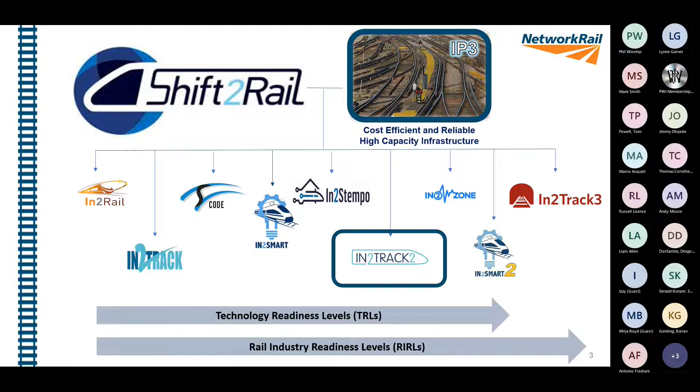Moving further forward, where we are and what we're trying to achieve in terms of the outputs of In2Track2 and then In2Track3, is to build technology demonstrators of solutions we've found for issues we know of within track currently, but also looking at, okay, if we start with a clean sheet of paper, what would we do differently? How could that be done? Some method of achieving the objective of reducing the delays and defects we might have with current technology, compared to what that might look like starting with a clean sheet of paper, and what we could develop to achieve the objectives.

So in terms of what we're looking at here, switches and crossings and plain line track. As you can see, you've got two work packages, WP1, WP2, WP3, WP4, in both of those different areas. Work package 1 is looking at enhanced S&C demonstrators.

We currently have S&C in track now. We know lots of failure modes that we have to struggle with in both work package 1, which is for switches and crossings, and work package 3 in the plain-line track. They're looking at what we've got now in terms of infrastructure, switch and crossing types, plain line track, and what failure modes we're really fighting to resolve. So let's have a look at those a bit closer and find some solutions as far as we possibly can.

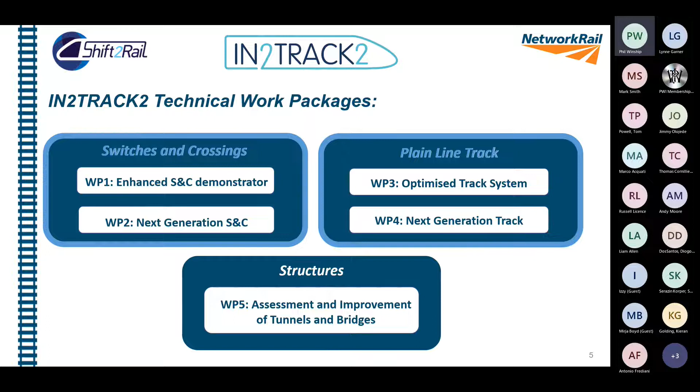So in terms of In2Track2, for the plain line aspects, we've looked at autonomous inspection and repair, track and S&C maintenance, and monitoring and sensing systems. These are just headline subjects within the work that's being carried out.

Kinematic systems, we're talking about point operating systems really - so actuation, locking and detection, and what issues we have at the moment with current systems, and what we could change to improve that. Design materials and components, that's across the board for switches and crossings and for plain line.

Autonomous inspection is part of switches and crossings as well, which we'll go into more detail later. Monitoring systems is something we're quite keen on introducing because we're really scratching the surface in terms of what we use currently. And the other part is digitization.

Looking at how we need to investigate building a track and switch and crossing digital twin. I won't go into details about what digital twin means and what it doesn't mean, but basically that's work looking at making, at a high level, a digital representation of the track and S&C, to use in the longer term as a maintenance tool - meaning we can look at how things degrade component-wise from real-time information from monitoring systems feeding into the digital twin, giving us asset life prediction and how we can improve that by changing certain components. Digital twin is quite a key area where we need to do a lot more work than we've done so far, and it's a very technologically advanced area of work that needs to continue.

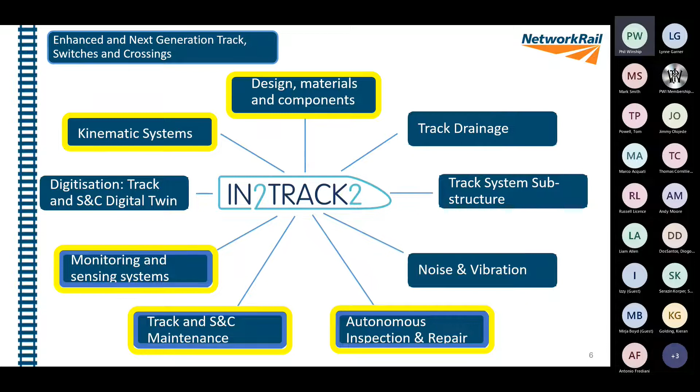So in plain line track, these are the projects we're going to talk about. Autonomous inspection and repair - in this piece of work with In2Track2, we looked at autonomous ultrasonic rail inspection, developing something more automated. Automated rail defect repair, that's the DDR, a discrete defect repair machine, which we'll go into more detail on. Rail stressing - how can we do that differently compared to how we do it now, and what tools and equipment are available. And monitoring and sensing systems, looking at thermal rail stress measurement and particularly track stiffness monitoring.

So those are the projects we'll talk about further as we go through. Looking at autonomous inspection, there are lots of areas where we can take forward ideas from different aspects of autonomous inspection and repair, and clearly look at how we actually take the data. We're very good at creating data, but really using it, making it more user-friendly so it's not too complicated for people to understand and operate.

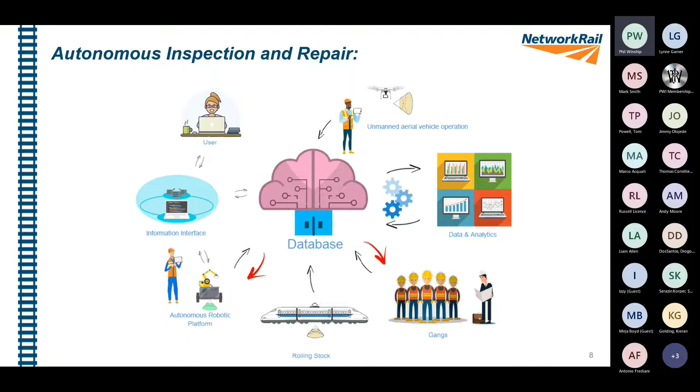This is a key area where we need to interface with lots of different systems, but make it easy to get the best out of it. Moving on to the autonomous ultrasonic rail inspection, this is linked to another project you may have seen on that list earlier, In2Smart and In2Smart2, which are more looking at control systems. Obviously, if you're going to have an autonomous vehicle, you need a control system to make sure it actually works the way you need it to.

This is basically a platform called the Warthog, which was bought for this particular project as an autonomous vehicle. It clearly isn't designed to go on track, it's just a platform used to show how this technology could be converted to a rail version of similar equipment, where it can go to a certain location, do an ultrasonic test, check for any defects, and then identify where those defects are. The next system, the Eureka moment, would be having a repair system that comes along after the ultrasonic system detects a defect and takes the defect out autonomously as well.

This is where this links in terms of work within the In2Track2 project from the track aspect. We need to liaise with other projects to understand how we control these types of vehicles. This is on the agenda and something we're looking to drive forward, to automate as much as possible to remove the human factor issues, which can be a problem in some cases.

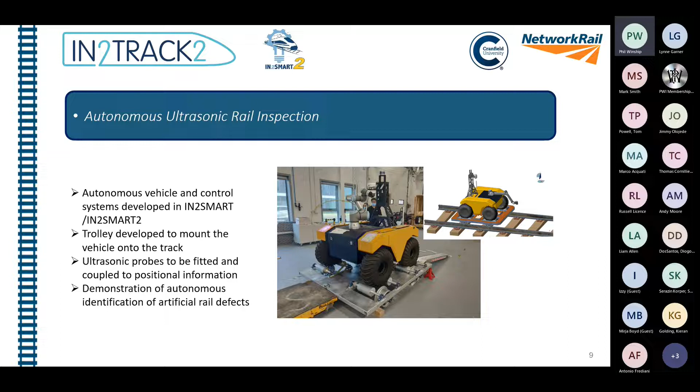The discrete defect repair machine is work that's been looked at in other projects outside the In2Track suite. Effectively it's an automated system to repair defects in plain rail. It's a solution looking at how we can take out squats, wheel burns, and those types of defects we commonly see in plain rail, taking out the actual person's involvement other than operating the machine from a tablet system.

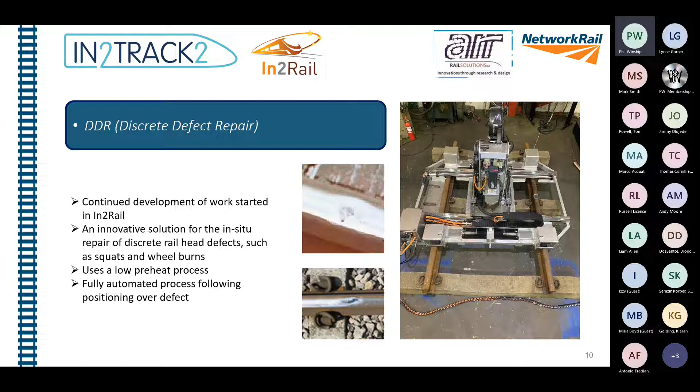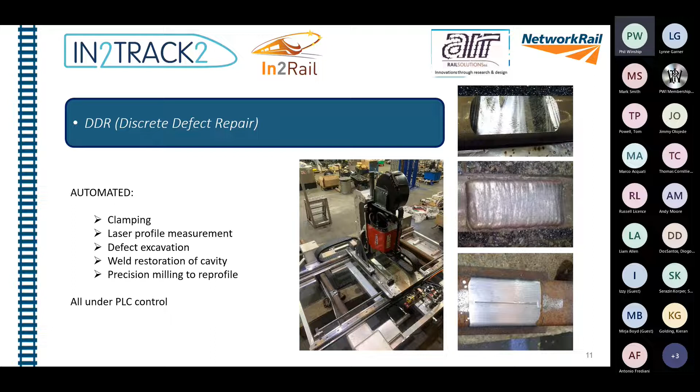It's fully automated and does everything needed to take out the defect, fill the void it creates with weld material, and then reprofile it to finish the rail back to an as-it-was-found situation, not as new. It takes into account things like side wear on either side of the defect and makes sure it blends into that area. It's got an automated clamping system and a laser profile measuring system, which needs to know what the profile should be after it's completely finished the weld.

Basically, this links to some work in In2Track3, but this is where we got to within work that finished off in January from In2Track2. That's the machine there effectively without any guarding on it, in the area where it's been tested to show it could work. A few things still need resolving, like guarding, to be able to get this on track to allow it to operate. We're going to be doing a trial of that in the next couple of months to get that worked through.

Effectively, it's milling out the defects, so it's not grinding or anything like that. It's quite a lot of industry firsts, as you see here. It's got low temperature weld restoration, so it doesn't use really high heat compared to the technology we currently use for defect repair.

It's got an air cool system, which it obviously requires to keep the temperature down rather than having it turn too high. And it's all CNC operated, so it's all controlled by a computer numerical control system for the milling head, which is obviously again something that's not been used before.

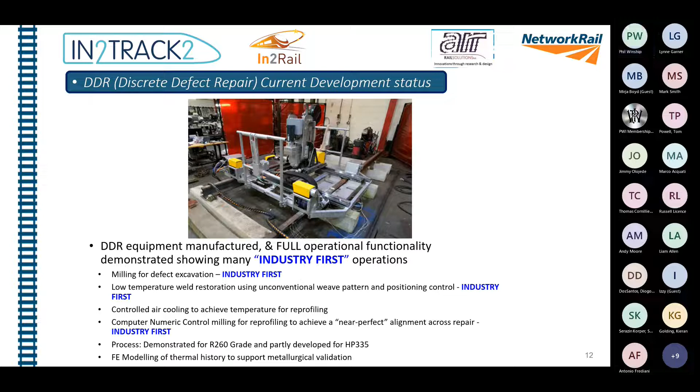Okay, this has been demonstrated on grade 260 rail, but we're looking at other rail types that we have in our infrastructure, HP in particular, because of the rail that we've used in the last few years. We'll look at finite element modelling of the thermal history of the metallurgy between the weld material and the parent metal, making sure we don't include any inclusions or defects that might affect the quality of the repair.

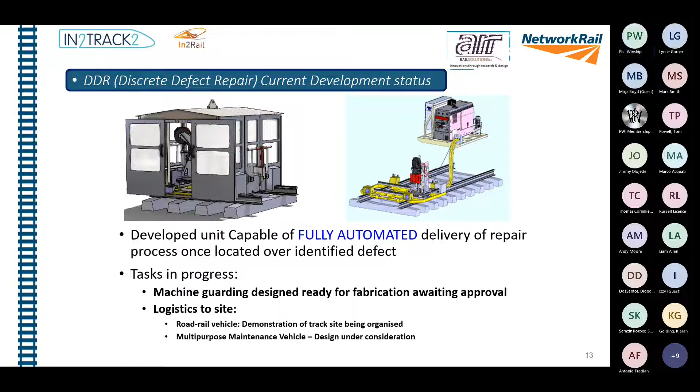So where we've got to at the moment is the system needing approval for a guarding system to go over the machinery, to look at how we do that from a safety perspective. We've just about got approval for that now, but it's going to take the logistics of getting the machine onto track to a different level. That's probably going to be done by something like an SRS machine, a truck with a bed on the back that can demount the machine into the right area where it needs to go. Then it can be operated and taken off track by the same method.

But here's a couple of videos that show how the machine works. There's a few that are maybe 20 seconds long that show a bit more detail about the machine and how it works. This milling head's taken forward through the removal of a defect by milling out the pocket to open it up to the right depth. We're talking about lengths of railhead between 50 to 100 millimeters in terms of defects we can take out, looking at the time it takes.

But that can be extended if you've got multiple defects like a wheel burn. You can take 2 of those segments out next to each other if necessary. But the time for the process to finish is going to be a bit longer to allow that defect to be repaired properly.

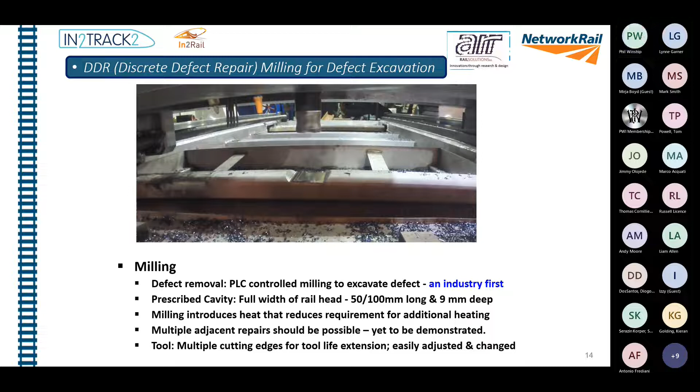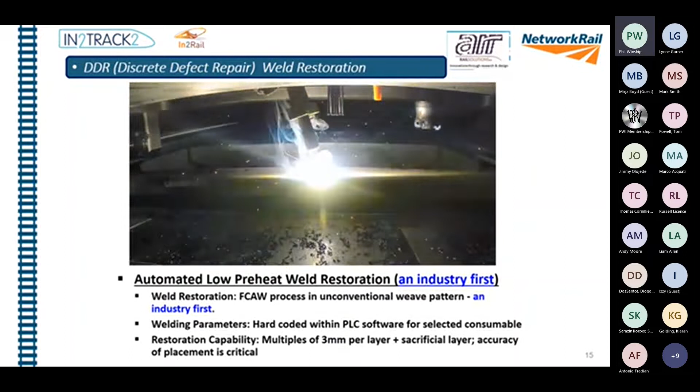So this is the next stage of welding the cavity to bring it back up to a profile that's above the rail on either side of the repair. And that's basically what it looks like. Nothing fantastic in terms of what it achieves. The way it does it is really the key thing, because anybody who's into welding knows that the distance between the wire and the weld itself is a key area where it needs to maintain that distance. So the machine needs to know that and adjust itself to keep that distance consistent.

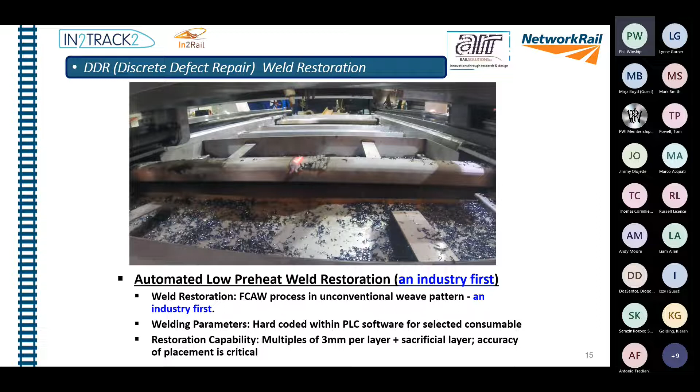Again, using a PLC, programmable logic controller, allows the system to be very well controlled. At the moment, as it says there, we do it in multiples of 3 millimeter layers, depending on the depth that's required. This is how we take the slag, if you like, off the top of the weld itself. These fingers, so to speak, excite and remove that material.

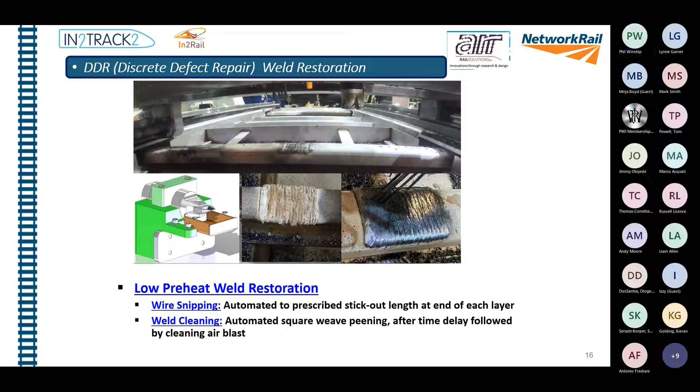So quite a lot of work's gone into that development over the last 2 years to get this to the stage where it's at now. And we're just about at the stage where we can take it on track, do a little bit more validation work after we've got the guarding put in place. So theoretically, we're looking at other areas of delivery, and that might be on the multipurpose maintenance vehicles, as well as using something like an SRS truck with a rail vehicle to take it on track and move it to whatever site it needs to go to.

But it's going to be a system where, with the work they've done so far, a repair takes about an hour. But clearly it's all computer controlled. It takes away the welder, the interface of the human factors and all those sort of issues. So you get consistency, and it is very reliable in terms of its actual use.

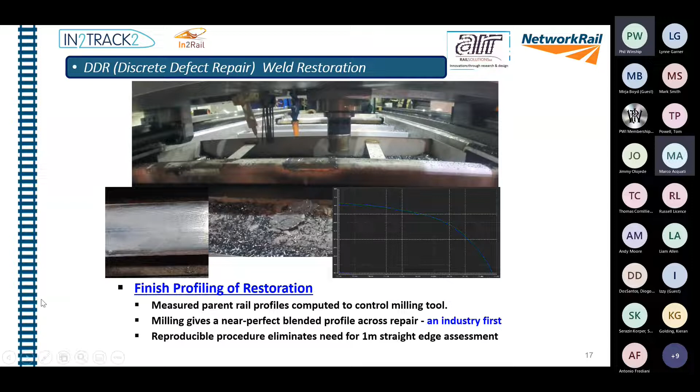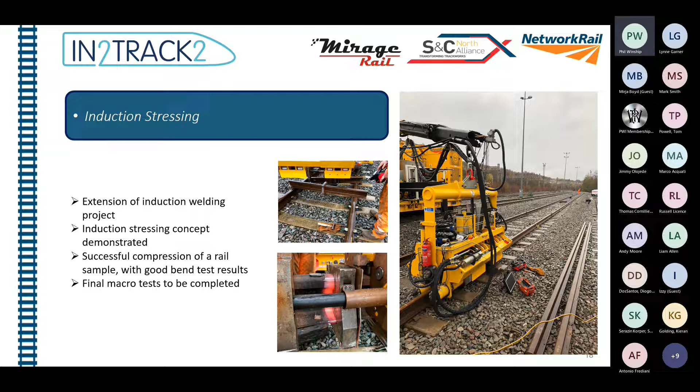So quite a lot of work's gone into that to try and understand a little bit more about how that could be done. I don't think it's got quite as far as we were hoping at this stage, but it's obviously a possibility for this to allow that stressing to be carried out at the same time as welding a rail in future with this system. So I think it's a case of understanding a little bit more about what needs to be done to work with this company to get this available as part of the service it can provide in terms of welding rail together.

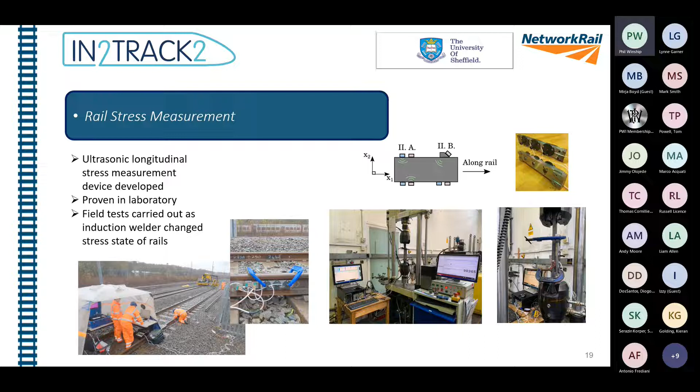Rail stress measurement. Obviously, we use various different systems at the moment to measure what stress we have in a rail. But this is looking at some method of ultrasonics as new technology to manage and measure stress better than we currently do with things like burst testing. So again, this is work that's in development from In2Track2, getting to a TRL stage of 3 and 4 at the moment. So it's a little bit of a way to go before it's available for us to start using in track, but it's looking very promising.

Other parts within the In2Track2 project are looking at stiffness monitoring of track. Clearly, it's an area where we've got quite a lot of data that we can see from things like the NMT, and looking at how that works. But there's two sides to this: what's the stiffness from the track point of view, and what does the vehicle see? If you've got some accelerometers fitted to a vehicle like the NMT, you'll get data from the vehicle perspective, which could be quite different from what the track perspective sees.

And looking at the data that's been captured from these particular systems and putting them into a model to understand what each of them is saying, and translating the information to see what the track and power car relationship looks like, is a key area where this track stiffness monitoring is going to hopefully give some good results to allow us to show how that track stiffness could change over time and what effect that has on the track.

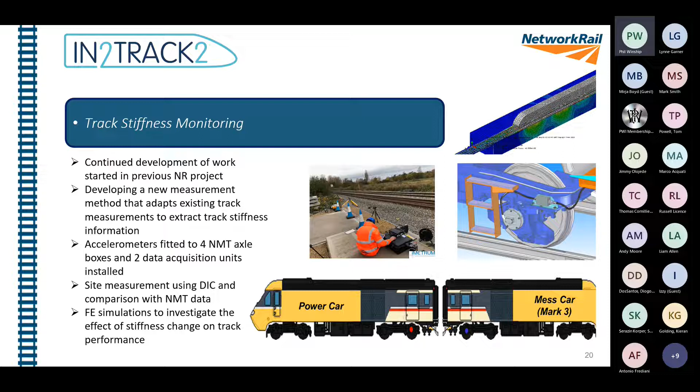So that's a quick run through the actual plain line track elements, which is mainly from Melanie's work. She would have done that presentation if she was well enough, but unfortunately not.

And moving up to my area, which is switches and crossings work, we've again looked at autonomous inspection and repair. So similar to what we've done with the discrete defect repair machine, we're now going to look at doing a crossing restoration machine. It's a similar sort of machine, but looking at how we can repair a defect in a crossing and a wing rail. So we'll go into that a little bit further in a minute.

Early inspection of S&C, there's some developments in that. We're looking to try and actually move that further forward in the In2Track2 project as well. But I'll give you a run through of what we've got so far with that.

Looking at track and S&C maintenance itself, additive manufacture or 3D printing, if you want to call it something slightly different, for S&C components. We've been looking at how that might work and what we could actually achieve from having that as an option for creating components in future, and what advantages and disadvantages there are for the particular requirements of different components where we might need this expertise and technology.

Handheld scanner, this is really looking at how we can do a quick scan of a switch rail and understand whether we've got an 053 switch derailment hazard that we need to do something about to protect traffic from running over that switch due to the issues that we've got.

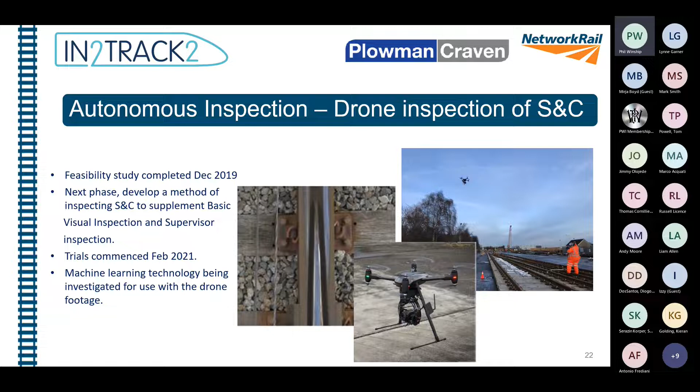But to allow us to actually get to that clarity, we need to look at what we call a ground sampling distance. If you think about your television, you've got different pixels on your TV screen to show you the full picture of what you're watching. The distance between the center of one pixel and the center of the other pixel next to it is this ground sampling distance. We had to get that down to about 0.94 millimeters, which is what we achieved.

That's quite a challenge, to make sure we got the actual clarity of the footage that we wanted, to show how we could inspect things and get the detail we'd expect somebody to see when they were walking the track. So that was a challenge in itself.

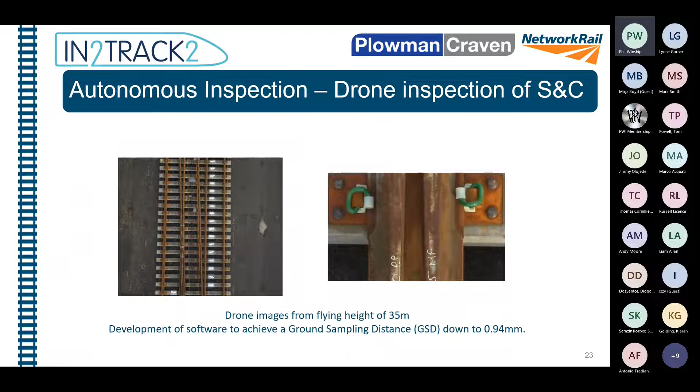So there's more work to look at how we can take dimensions off that footage. But clearly the other part of that is looking at how we can actually identify what changes might have occurred since the last inspection.

So looking at things like plain line pattern recognition from a train point of view - can we do that with a drone? Effectively, yes, you can. This is obviously a few slides here that will show what's actually been developed so far, just to basically show the concept is feasible.

You've got to train the model to see what it's actually looking at in the footage the drone is showing - this is still footage, not a video. You can actually mark up the clips in this case just to understand exactly what the software needs to see.

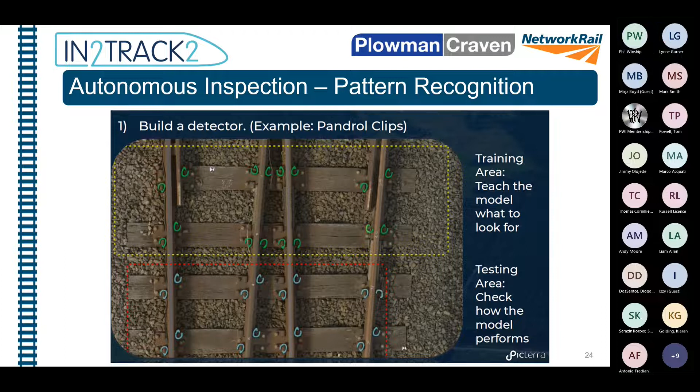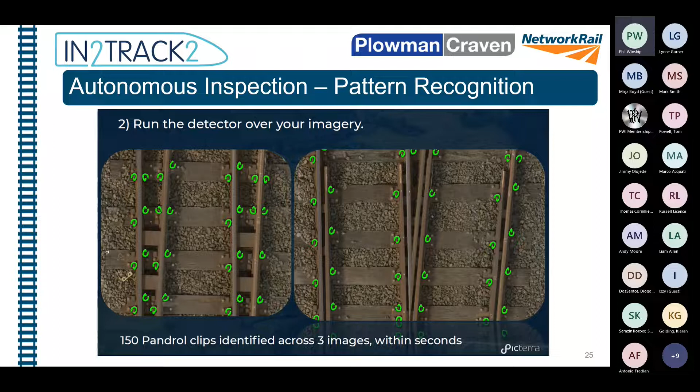So you've got to teach the model effectively what that clip looks like and what position you're saying looks okay, and when you look at some other clips, what position you expected that clip to be in. And if it's not in that position, how you actually flag up that something different has occurred. So you run the imagery with that requirement for where clips are to be identified, and this is the type of thing you get within a few seconds after it's been trained to recognize that.

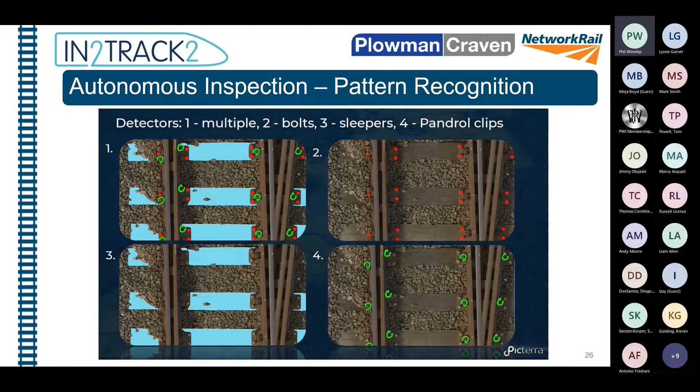So what I'm going to do with this is show a picture of two surveys. This is a still photo. I'm going to click on the link in a moment. One survey is from March 2021 and one from September. The cursor in the middle is basically separating those two surveys. If you move the cursor left and right, you'll see what's different in terms of the actual inspections. Hopefully this will work.

So this is part of the software that's been tested, if you like, to actually show what we've got here. This is obviously a very high level view of the track, so I'm just going to zoom in to a piece of track to show where things have changed. Just move it along a little bit, and zoom in quite a bit.

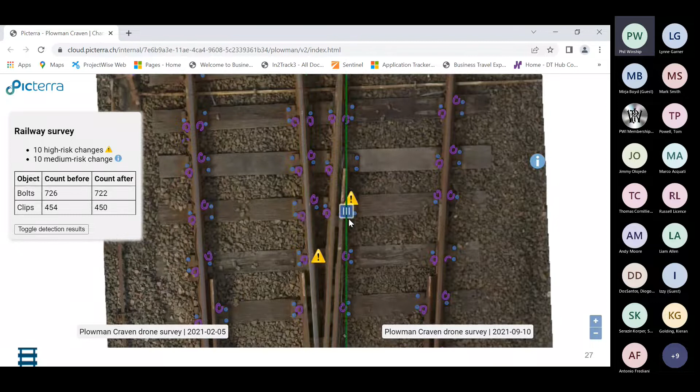So all those triangles are areas where the software has recognized something not quite the same as it was before. If I zoom a little closer, you can see on this one in particular it's got this identification mark over the clip. So on the 5th of February last year, the clip was in that position, and the other inspection in September on this side is slightly different.

If I move the cursor over, you'll see what happens when the clip is passed over - the clip's moved, it's obviously come out over that time. That's what this type of software can do, and that's the sort of powerful imagery you can get that's quite easy for anyone to use to show any difference that might have occurred between two inspections. On the left-hand side here, you've just got a count of different bolts and clips, and the discrepancies are these hazard triangles - yellow triangles with an exclamation mark - indicating that something seems to have changed, and you need to have a look to understand what that is.

And in this case, the clip's come out. So it just shows that type of thing where we can use the software to articulate what has actually happened in terms of inspection purposes, and it can clearly be identified and pinpointed to where we need to look rather than having to look through the whole of the S&C unit and inspect it individually just by somebody looking at a video.

So that's the technology basically of where we are with the drone itself. That's a work in progress in terms of where we are with that work. We're looking to take this further forward to actually develop it to a point where we can start showing it as a potential for us to introduce something like this in future.

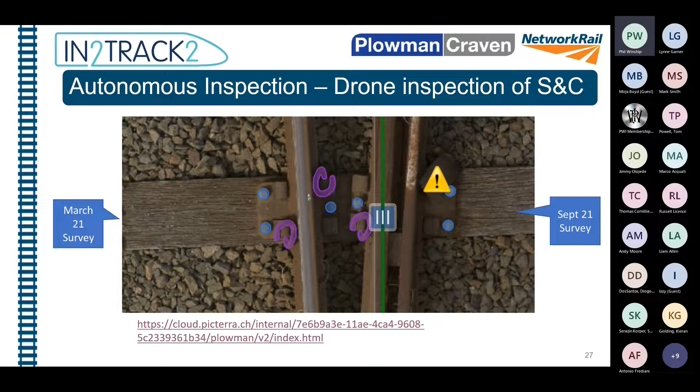Okay, autonomous inspection. Moving forward to autonomous repair, we're looking at, as I mentioned before, how we can develop something that will repair a crossing automatically, so it doesn't allow us to have the problems we've got with weld repair crossings at the moment. For those who may not be familiar with crossings, you've got a different profile on the crossings, and it depends on the angle of the crossing, which is an issue that needs to be considered.

The direction of traffic can be another problem where one particular part of the crossing, one side, actually sees more wear than the other. So that needs to be something that's looked at to understand how we actually repair a crossing to make it suitable for traffic still to run that direction, but clearly taking into account the less worn side that's on the other side of the actual wear area we need to repair.

But the thing that's important for us is to make sure we look at the wing rail and crossing nose relationship. At the moment, the bigger problem for us is actually the height difference between the nose of the crossing and the wing rail.

If we start getting batter on the wing rail itself, or the crossing nose more commonly, that height difference can increase, and it's just then a vicious circle. You get more impact through acceleration of the wheels hitting the crossing nose as they pass over that gap.

Therefore, you get more batter and more damage occurring on the actual crossing itself. So theoretically, if we can actually repair the wing rail and the crossing nose, so we can reduce that gap, even if we're recreating a sort of worn profile that may be required because of the actual wear that's been seen on the crossing itself, we can reduce the height difference between the nose and the wing rail. We can reduce the actual impact loading that the wheels are putting on the crossing, therefore bringing us back from the point where we might actually develop a crack in the crossing or break the crossing itself.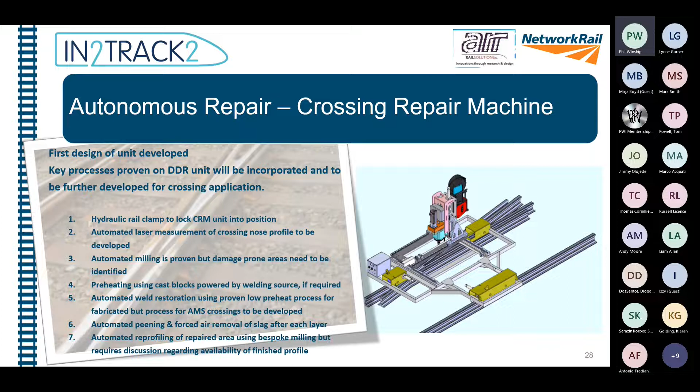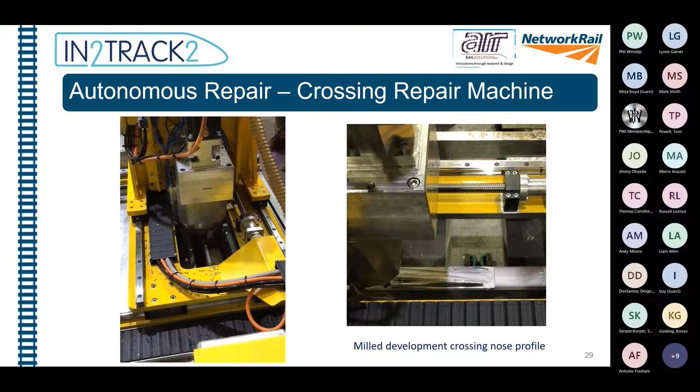And how it would actually mill that out of something solid like this at the moment. So that was just a development phase to try and understand what was possible with the software, how it actually worked, and how we created a profile of the nose itself, because obviously the actual gradient of a crossing nose as it comes up from the point is quite different in terms of different crossing angles. So it's a key area to actually understand what software needs programming to give us that profile that's required, taking into account any wear on the wing rail and crossing that needs to be factored into the repair itself.

So moving to additive manufacturing of components. Well, this is something that we've looked at because of issues maybe in terms of legacy components. If it's a specific component that's bespoke to a junction, it might be a case that if we try and order a new one, the manufacturer might not have actually made one for 20, 30 years. So the mold, because we cast obviously most of these at the moment, may have been ditched because they deemed it never being used, so why are we keeping hold of it?

So what we can do in some instances is look at reverse engineering componentry. So what you see on the right-hand side is a guy with a scanning system, a laser scanner that's actually been pointed over the actual component, and then it creates a CAD drawing of it. So this is what you've got in the blue photo there at the top - that component is actually a distance block. That really creates a CAD model of what that component looks like, every shape, every nook and cranny.

And if you look on the bottom in the middle, you've got some little areas where somebody looks like they've hammered the actual component at some point, and it's even got those indentations actually modeled as part of the CAD profile. So that's how powerful these laser systems and CAD drawing generation is - it creates the actual mirror image of what it sees.

So as part of 3D printing, we can then look at optimizing that component. So what I mean by that is we've got a big solid block of cast iron there potentially, in terms of what we use currently. But is it over-engineered? Is it a case where we can reduce the amount of material we're using, therefore reduce the cost, but obviously try and maintain the actual performance requirements for that component?

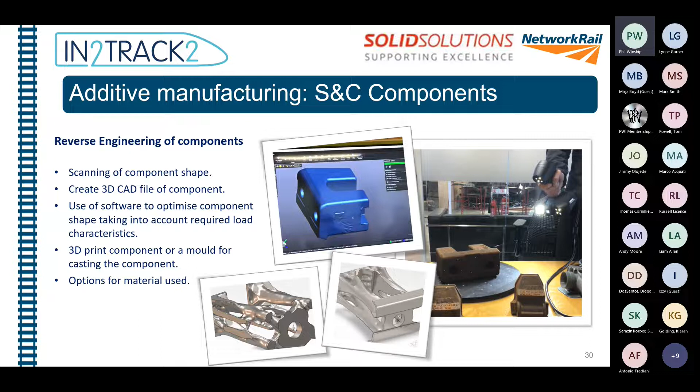So we can reverse engineer that to give us the flexibility to still make those components, without the problem of finding out where the mold's got to over the last 30 years. So it's an option for us for legacy systems, particularly where we know we don't have a manufacturer making these systems or components anymore, to allow us to recreate them. So it's quite a powerful way of taking things forward, especially with the number of legacy type components we've got in plain and track and in S&C.

This is a very early prototype at the moment. It's going to be something a little bit bigger than a large mobile phone. It'll have an app on it to allow you to look at your mobile phone and see the data coming off it, rather than having a screen on the system itself, because that would make the actual system quite bulky. So effectively, this is something developed to show a quick and easy way of assessing a switch.

If you're inspecting the switch and you think something looks a bit suspect as to whether it's a derailment issue or not, you can check this with this particular device to find out the answer. It takes out the human factor issues of actually putting the gauge on the track, offering the P8 profile up to the switch rail, and understanding visually where that contact point is. At the moment it's quite heavily influenced by human factors in how we inspect switches this way, so this device should give us consistency without those issues.

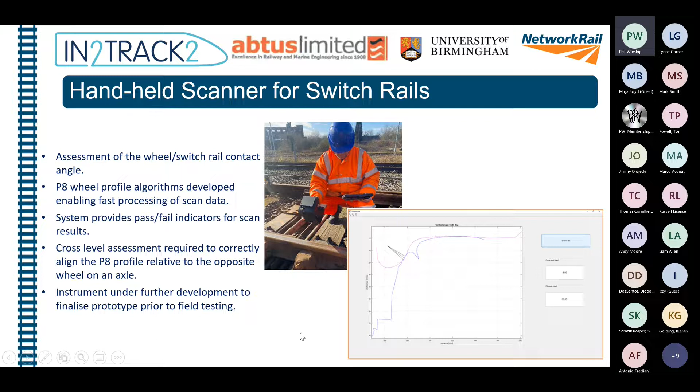It's going to be quite interesting to see how this finishes off in terms of its size and capability in the next 12 months. We've got about another 12 months to work on this particular project, with a lot of influence in terms of using lasers to do some assessments of the instruments on the switches we look at.

And then our NR56V crossing, quickly moving on to that one. A lot of work has gone into modelling what the wheels need to change in terms of the profile of the crossing itself. The University of Huddersfield has done this work, looking at around 100 different wheel profiles of different types, different wear rates, and different potential issues—some very obscure, others quite common in terms of the wear we see on the different types of wheels that run on our infrastructure.

From that, it's been a bit of a compromise to understand what that profile then results in, in terms of optimizing the requirements for that crossing. It's been a trade-off because of various issues, such as different directions of traffic, different wheel sets, and different vehicles reacting differently with suspensions, etc. So a multi-body simulation has been done with a model developed to allow us to put all these potential parameters in, to come out with a profile that is a compromise but gives us a lot more flexibility in terms of the height of the crossing nose to wing rail relationship.

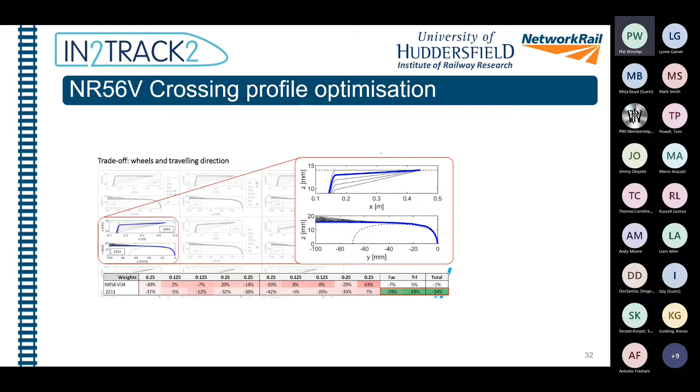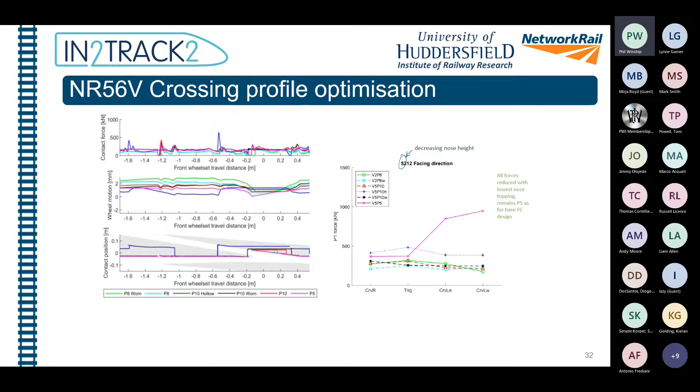This is some other modelling looking at how stresses are applied to the gauge corner, how it moves over in terms of its trajectory as it moves from the wing rail to the nose of the crossing, depending on the profile of the crossing itself. Quite a lot of work has been done on the type of profiles we see on crossings now, and what we need to achieve in terms of changing what that profile looks like to reduce the forces, using this type of modelling system.

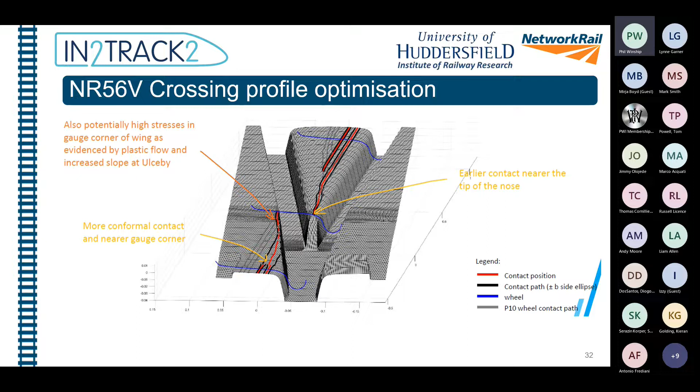And finally, looking at switch rail coating. So this is something we're trying to actually look at, whether there's any potential for us to coat the switch rail, or maybe clad it if it's a thicker layer, to reduce the actual wear rates of the switch rail. So if it's 260 grade steel, we could add a tungsten carbide type material perhaps, or something like that, and whether that will reduce the wear rates at the switch rail, give us more life and reduce the defects we see. So lots of work has been going on to look at that with the University of Sheffield.

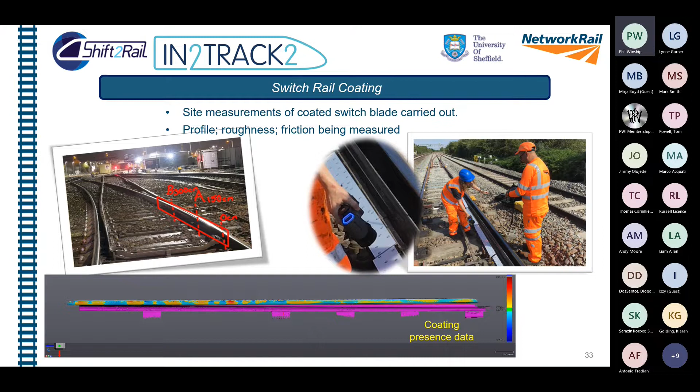It wouldn't go in mainline track because clearly there's quite a lot of issues in terms of safety case, etc., to allow us to get that put through. But we'll be looking at perhaps another railway environment, maybe somewhere like British Steel's site, where it's using rails to move things around the steelworks, but it's not going to be safety critical in terms of passenger traffic, etc. So quite a lot of work going on in that area to look at what type of coating might be useful and whether it's viable in terms of the potential benefits it might give us.

Okay, the next stage was looking at RFID tags. So you're thinking, well, why on earth do we need to know where our S&C is? Well, the problem we've got at the moment is there's lots of legacy systems like GEOGIS, for example, that have been brought forward into the S&C Ellipse condition monitoring module. And that means the legacy systems have different areas in terms of where they've been programmed to say where S&C starts and where the S&C finishes. And there lies a problem: sometimes we get black holes of a few meters, maybe 20, 30 meters, where the track recording vehicle says the S&C is here, and physically it's slightly somewhere else in terms of what the trace is seeing.

So if we can look at putting an RFID tag on two points which we know shouldn't move, and that's the crossing nose and the switch toes, we can then articulate where the S&C starts and where it finishes. So when you're looking at your trace from a track recording vehicle, you can actually see where the issues and defects, if you like, actually are.

Are they actually in the S&C, or are they on the approach or beyond the S&C? And this is the sort of area where we can actually align all the systems we have to say this is now a definitive way of identifying where your S&C actually is, and how that relates to what we've got from a track recording vehicle.

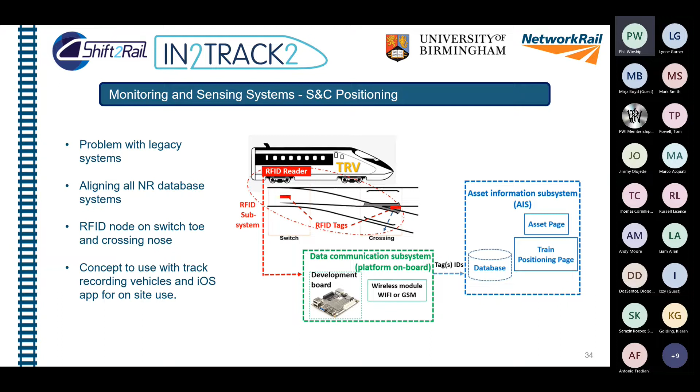So there's no requirement for somebody to have lots of expertise and skill in measuring S&C and assessing whether there's any radius or any other special features in the S&C that they need to put on the order, which is clearly going to be quite an advantage for us in future.

So this is just a quick run through of the testing that they're doing. The University of Birmingham have got this test facility in Derby, which is about 200 meters long. They've been assessing whether we use a passive RFID tag, which isn't sending information anywhere or being charged, so it will only activate once the train goes over it, or semi-passive, in other words, one that's semi-alive, or awake, and gets linked to the train as it goes over. So those are the areas they've been assessing.

What we've got on the right hand side is this little model train that can fire down that track at around 30 miles an hour. So it's reflecting in scale terms whether a high-speed train would be able to read the RFID tag at that type of speed. There's lots of work being done at the university to understand what's possible with these tags and decide which is the optimum type of tag for taking this project forward. And In2Track2 itself is moving this to the next level in terms of technical readiness levels.

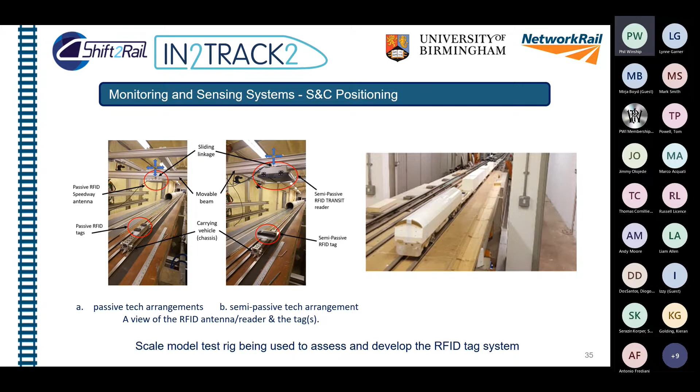So it does away with the common legacy type of switch, where you've got that very thin blade that develops into a full head section of rail at the heel end. It just moves the full head section of rail from one position to another using these drives. Each of these has the power to move the system if failures occurred in the other two drives. So one drive could still operate the switch in a degraded mode, allowing that redundancy to keep things moving while we get out there and repair the other two failed bearers.

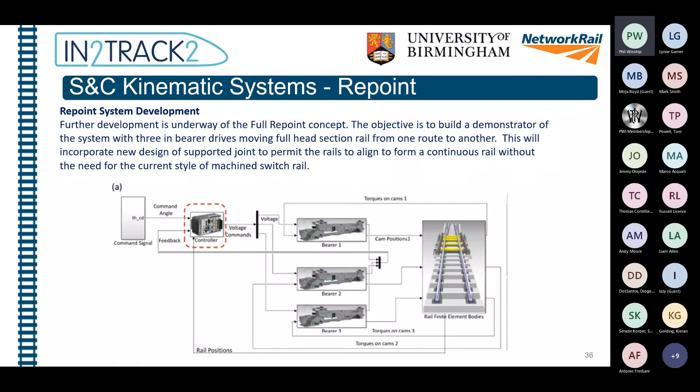There's obviously a lot of work going on at the moment to understand what that joint needs to withstand in terms of its forces and the type of design that means it needs to have. So quite a lot of work going on for getting this across the board in terms of its design, and the potential then is seeing whether we can actually put a demonstrator together, whether it's a scale model or full scale, to actually put this line side. It wouldn't go in track at this stage because of lots of safety issues that we need to resolve, just to show its functionality and how it can be used in future.

And clearly, if we're only using full head section rail to divert trains from one track to another, we basically get rid of lots of 053 issues that we currently have for derailment hazards. Doesn't mean to say we haven't got a derailment hazard necessarily in here, but it's going to act more like a train going around a curve rather than using a switch rail to divert the wheels to the opposite track.

And that's quickly a whiz through of where we've got with In2Track2. And clearly, as I said, there's lots of work going on at the moment with the In2Track3 project to take a lot of these concepts further forward to get them to a higher TRL stage.